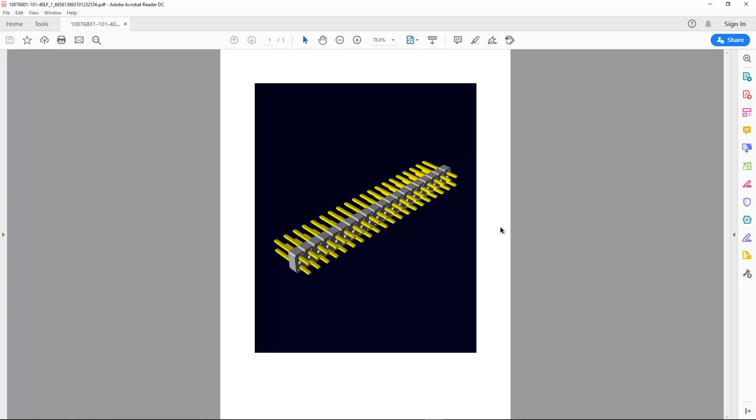We can now review the 3D model. You can select the Library tab, see the 3D model section, and we'll search for a connector. In the 3D model, you can see that we have the name, the partition that it's placed in, as well as a 3D PDF to validate the 3D model. In the 3D PDF, you can review, validate, rotate the 3D model to see if it matches your mechanical library.

Now that we have the 3D models imported, we can now assign them to our part or cell in our central library. This is done through the mapping file. This can be accessed through the 3D models import mapping file option. To use this command, we have a pre-configured mapping file which associates the part numbers to the 3D model. This will also bring in an alignment file that we have created prior to this import.

If you don't want to use the alignment file and want to use the absolute coordinate system of the 3D model, you can use the model's origin command. We will assign these 3D models to the components using the import mapping file command. The import is finished, and we're ready to review the 3D model assignment.

To see the assigned 3D model, we will go into the Components tab and search for one of the 3D models that we have mapped to our component. We can do this by selecting the object and opening the 3D Model Manager. In the Model Manager, you can see that we have assigned the model directly to the component in EDM Library.

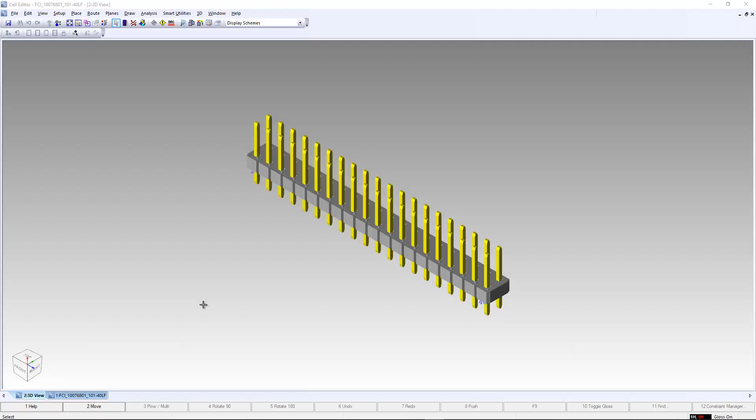We can modify the assignment and see that there's manual alignment of the 3D model, and we can review it in Cell Editor. In Cell Editor, you can see the 3D model imported and aligned with our 2D cell.

Next, we'll start some individual assignment. In this example, we have a 28-pin SOIC. We'll go into the 3D Model Manager. In 3D Model Manager, you can see that there's no 3D model assigned. In the Modify dialog, we can use the Find 3D Models to search a parametric database that we have built with our starter library to query data that's associated to your 2D cell.

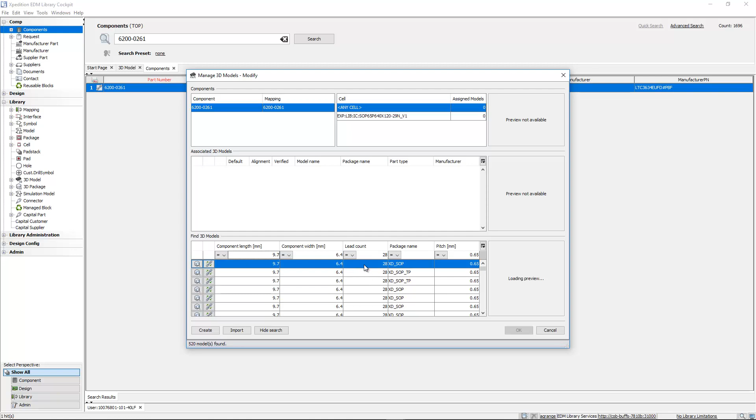In this case, we're looking for a 28-pin SOIC. The pitch is 0.65, and the component width is 6.4, and the length is 9.7 millimeters. As you can see, as I was entering criteria, it was automatically filtering the 3D models for associated components. In this case, it doesn't have a test point, so we just want the SOIC added to the design, which we can do through the Assign button.

We can actually preview the data using the preview icon. You can review the 3D model in the 3D PDF, and you can even open Cell Editor. In this case, this is satisfactory, so we're just going to assign this 3D model and commit our assignments.

The last assignment we will do is through the STEP import or a third-party file format. In this example, we downloaded the STEP file directly from the manufacturer for a connector. We'll go back into the 3D Model Manager. We'll modify the assignment. Press the Import button to open up Cell Editor.

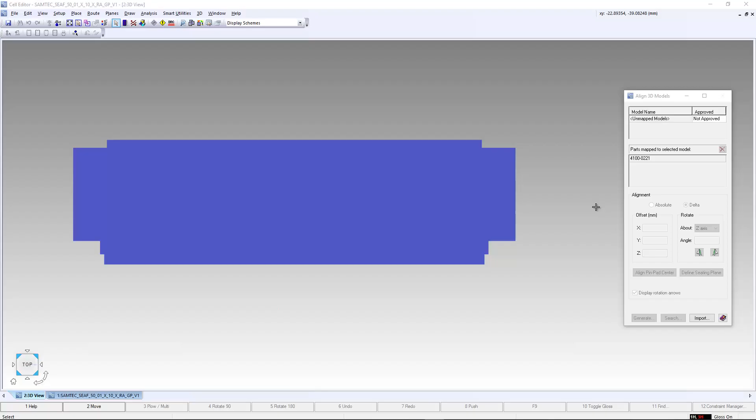In Cell Editor, we can select the part number and Import button to browse for our 3D model. As you can see, we support SAT, IGES, and native NX part files directly in Cell Editor. We'll select our connector that we downloaded from the manufacturer and press the Import button.

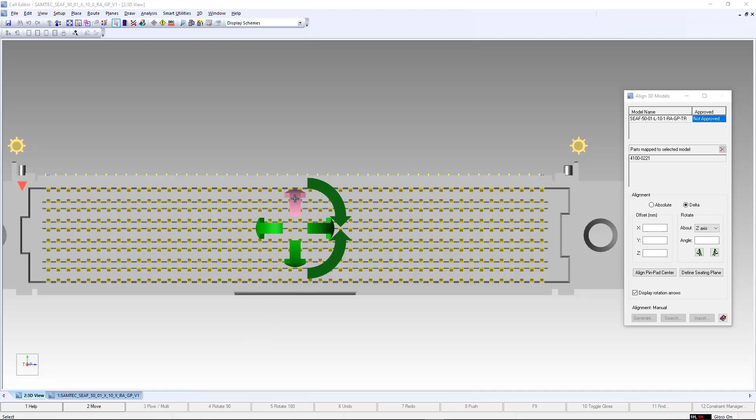In this example, you can see that in this 3D model, the absolute coordinate system, the orientation and location is different than the one that is expected in Expedition. In this case, we have our rotation markers to quickly align the 3D model. To see that it's placed in the correct orientation, we can turn that off and align the pin pad center with the 3D model and the 2D cell.

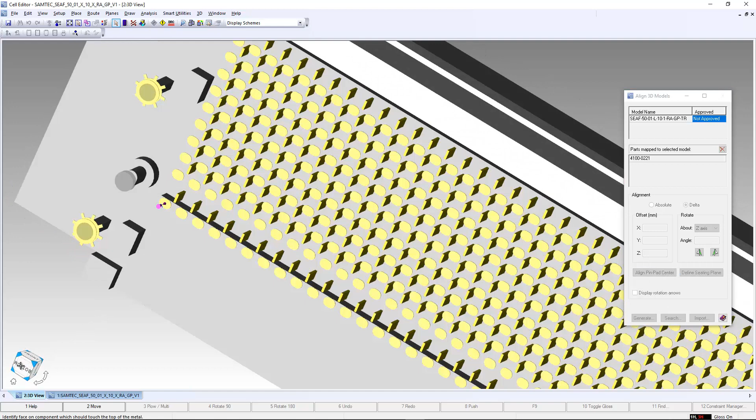We can also define the seating plane of where this 3D model will be sitting, most likely on the component pin pad. And you can see that we can quickly align and bring that 3D model directly into Expedition.

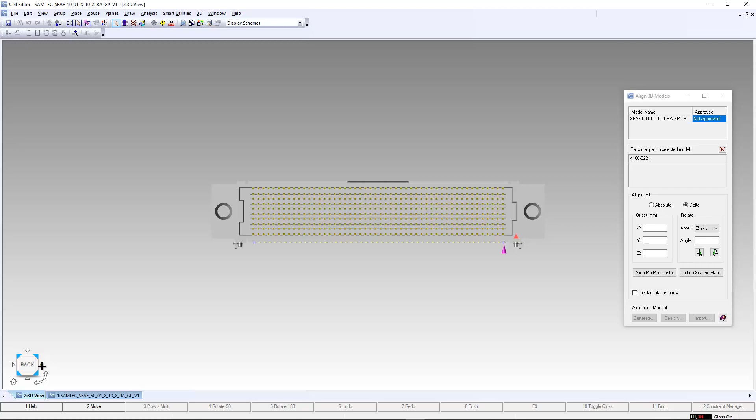Now that we're finished, we can close Cell Editor, save our changes, see that the model is assigned, and then commit our 3D model assignment. We have now bulk assigned and individually assigned 3D models so that you're ready to start your own 3D model assignment in your central library.